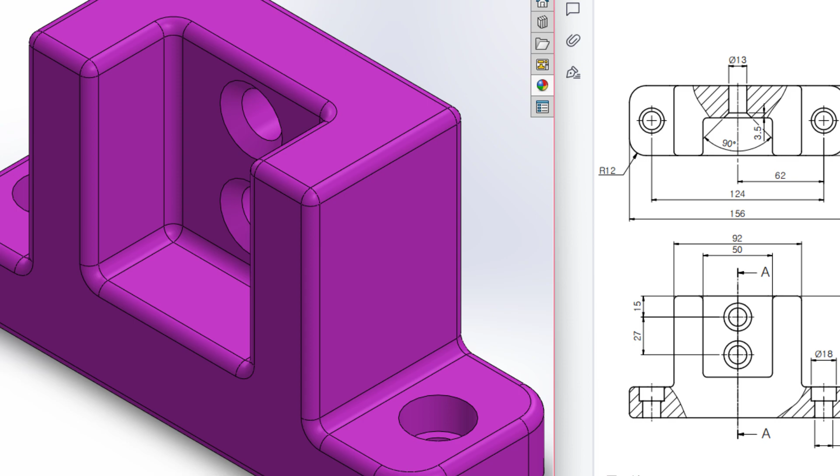Today we are going to solve this 3D problem. In this 3D problem, this is the top view, this is the front view, and this is the right side view. So first of all, I will start drawing from the top view.

In the top view, I will draw this rectangle, and this rectangle has a dimension of 156 by 50 units. Then I will boss this rectangle to 22 units.

After that, we can see we have another rectangular profile here, and for drawing this rectangle we will draw it in dimension of 92 by 50 units. Then I will extrude boss it to 65 units.

Then in this second rectangle we can see we have a rectangular cut like this one. For drawing this rectangular cut I will draw a center line here, and this center line has a dimension of 50 minus 23, which will be 27.

And as the rectangular cut has a distance of 50 units, I will offset these two lines, so this half distance will be 50 divided by 2, so 25 units each. Then I'll close these two shapes, then I will extrude cut it to 58 units. Okay, let's go back to our software and do this.

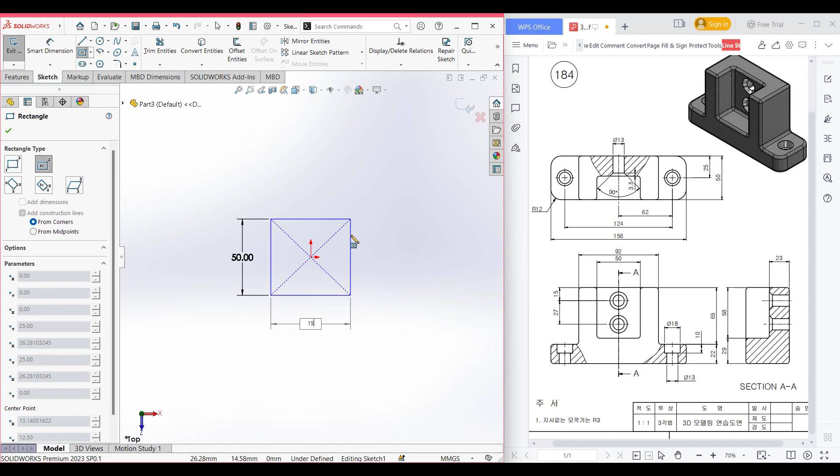First of all, I'm selecting the top plane here. Now right click on it, now sketch. After that, select the center rectangle from here and place it here, and draw a center rectangle of dimension 50 by 156 units. Okay, now isometric it for a better view.

Now go to features, now extrude boss, extrude it to 22 units. Okay, so this rectangular portion has been done.

After that, select this upper face, now right click on it, now sketch, now normal to it. After that, again select the center rectangle and place it here. Now dimension this rectangle to 50 by 92 units.

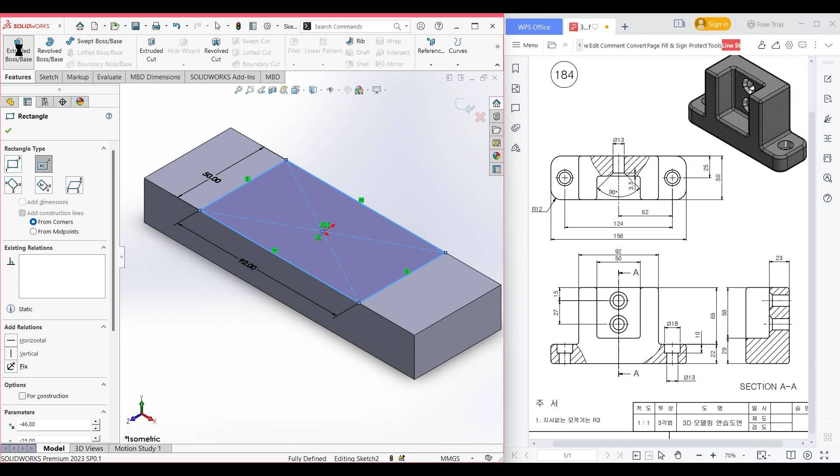Okay, now isometric it for a better view. Now go to features, now extrude boss, extrude it to 65 units. Now press OK. So now it's time for the rectangular extrude cut.

For doing the rectangular extrude cut, I'm selecting this upper face. Now sketch, now normal to it. Now select the center line tool from here and draw a center line of 50 minus 23, so it will be 27 units.

From that, select the offset entities and select this line, and as the total distance is 50 units, the half distance will be 50 divided by 2, so it will be 25 units. Now bidirectional cap ends, now press OK.

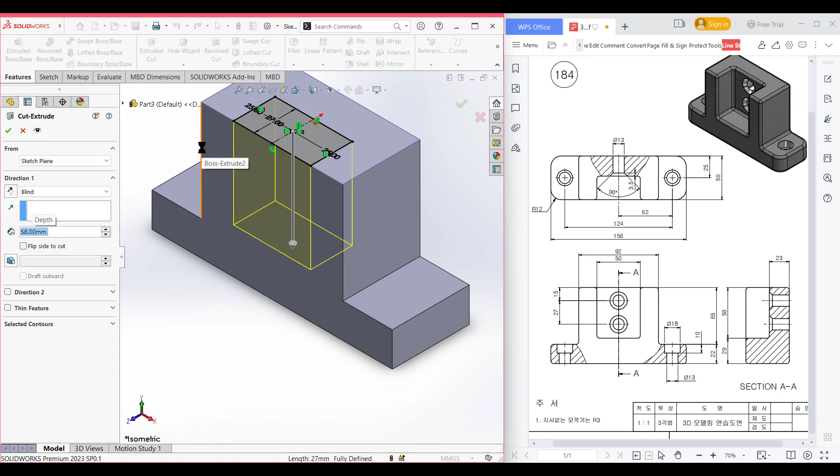Now isometric it for a better view. Now go to features, now extrude cut, extrude it to 58 units. Okay, now press OK. Now let's go back to our sketch.

In our sketch we have two circular extrude cuts, one is here and another two are here. For drawing this circular extrude cut, first of all I will draw a circular extrude cut here, and this has a dimension of 18 diameter. Then I will extrude cut it to 10 units.

Then we have another circular extrude cut here, and this circular extrude cut has a dimension of 13 units. Then I will extrude cut it to through all. After that I will select the right plane here, and then I will mirror this other part also.

Okay, let's go back to our sketch. So I'm selecting this face, and before going back to our sketch, you can see the circular profile here has a distance of 25 units from this line, and from this center line it has a distance of 62 units.

Okay, let's go back to our sketch. So I'm selecting this face, now sketch, now normal to it. After that, select the circle tool from here and place it here and draw a circle of 18 diameter. Now select the smart dimension, select this circle, and from this line the dimension is 25 units.

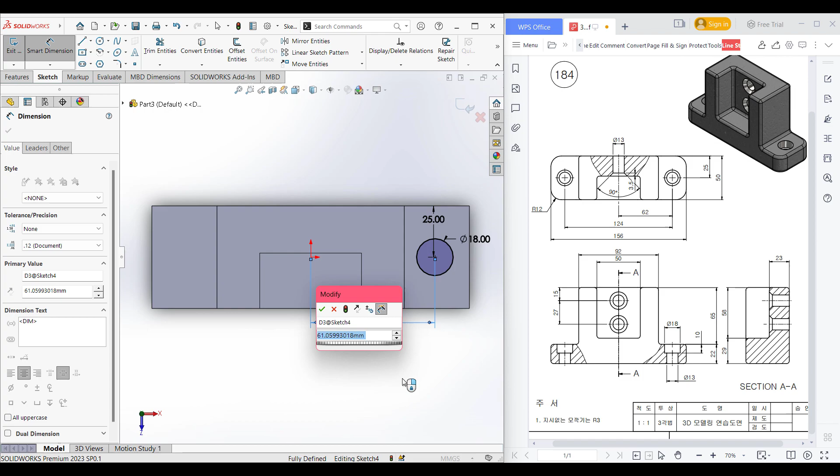Now press OK. Again select the circle, and from this center the dimension is 62 units. Okay, now isometric it for a better view. Now go to features, now extrude cut, extrude it to 10 units.

Okay, this extrude cut portion has been done. Now zoom here and rotate it. Now select this inner face, now right click on it, now sketch, now normal to it. Now select the circle tool here and place it at the previous circle center and draw a circle of 13 diameter.

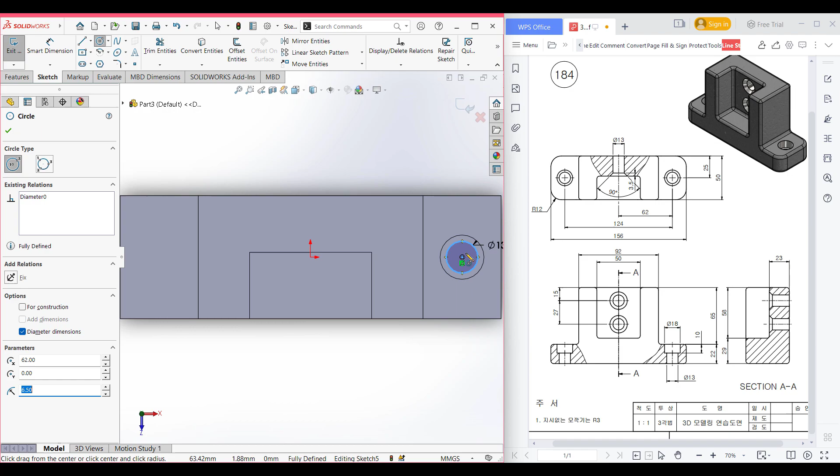Okay, drawing a circle of 13 diameter. Now isometric it for a better view. Now go to features, now extrude cut. Now extend this arrow. Okay, now press OK.

So this circular portion has been done. Now isometric it for a better view.

Now it's time to mirror in this other portion. For that I'm selecting the right plane as the mirror plane. Now select mirror, as I have previously selected the right plane, so the mirror face plane has been selected automatically. Now I'll select the features to be mirrored. We want to mirror the Cut-Extrude2 and Cut-Extrude3 portion. Now press OK. So our mirror portion has been done.

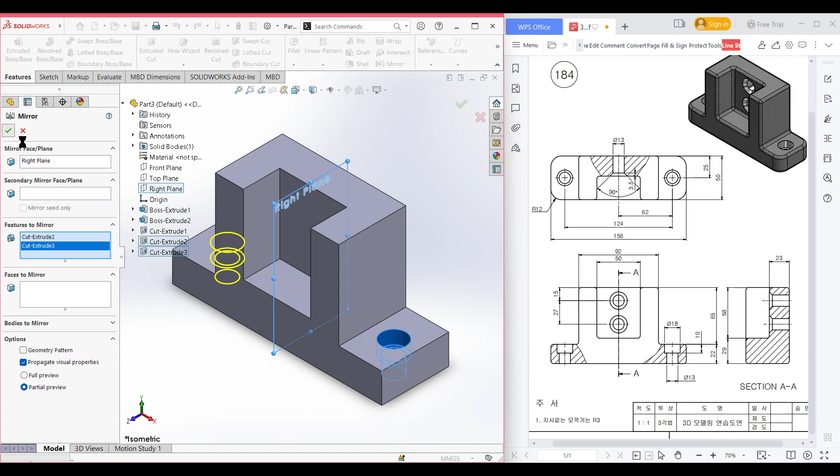Okay, let's go back to our sketch. This time we need to draw two holes, here and another here. For drawing this hole, we can see this circular portion has a dimension of 13 diameter, and we have an angle of 90 degrees here, and this distance is 3.5 units. Now how will we draw it?

For drawing this, I will use the hole wizard here, and from there select this legacy hole, and select the countersink drilled. If we match the sketch here, we can see this lower portion diameter is 13. So here we put the value 13. As I have previously put the value, it has already taken shape.

Then we can see the angle is 90 degrees here, so the countersink angle here and here is set to 90 degrees. And after that we can see the countersink diameter here is 20 units. So how has this diameter been calculated?

If we demonstrate our sketch here, this is our sketch, and the total angle is 90 degrees here to here. So if we draw a center line here, as the total distance here to here is 3.5 units, this distance will also be 3.5 units. And the angle is 90 degrees total, so this will be 45 degrees and this will be 45 degrees.

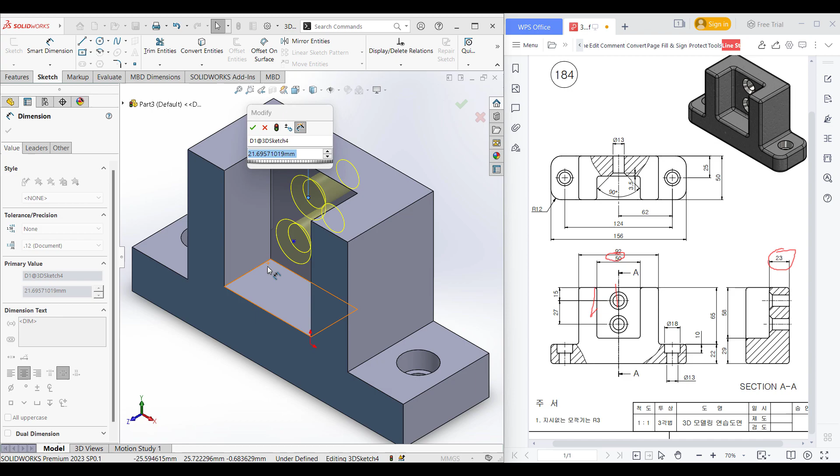And the same for this lower portion also, so the distance will be 25 units. So this two portions have been dimensioned. Now normal to it. After that we can see we have an upper distance of 15 units from this line to this circle, then both circles have a distance of 27 units. So go to smart dimension, and from this point to this horizontal line the distance is 15 units, and from this portion to this portion the distance is 27 units.

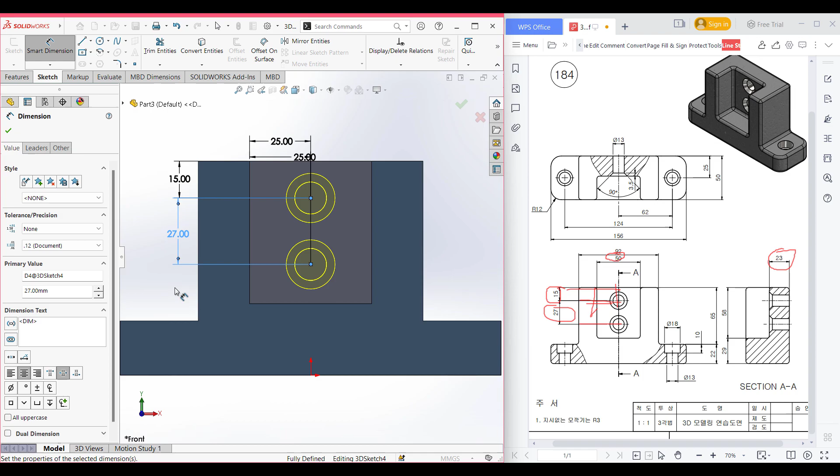Okay, now isometric it for a better view. Now press OK. So our countersunk hole has been cut.

And to measure this distance to this distance, which is 3.5 units, I will use the evaluate measure, and from this circular part to this circular part, if you want to see, you can zoom here. You can see this center to center distance is 3.5 units, which matches our sketch. So our sketch is doing well.

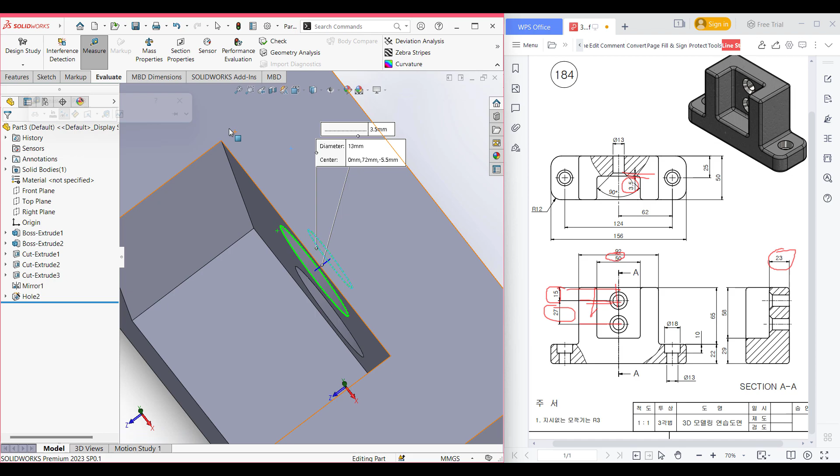Now isometric it for a better view. Let's go back to our sketch, and this time we have the fillets to be done. We can see we have one fillet and another and another, and all of these fillets are 12 units. We have many fillets in the total sketch here, and all the other fillets are 3 units. So let's go back to our sketch and fillet all the portions.

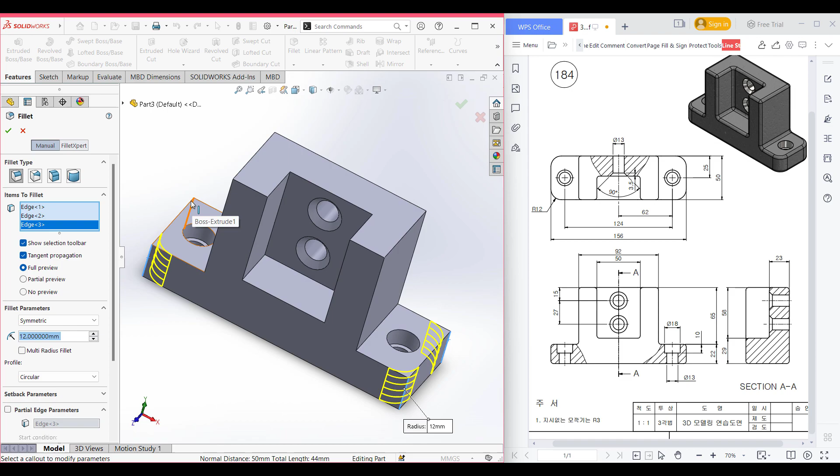So I am selecting the features now, fillet. Now for the fillet, select the 12 unit value. Now select this line and select this line, and you can rotate here, or hover to see the back face of the line, or rotate and select manually. Now press OK. So this R12 fillet has been done.

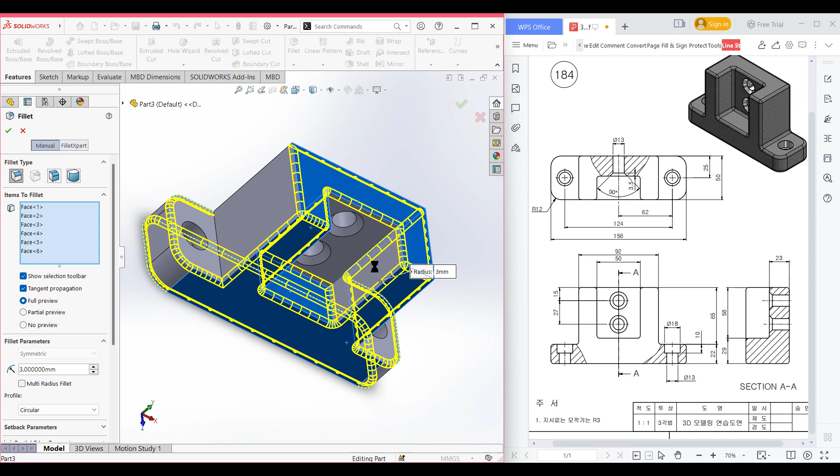Now we need to draw the R3 fillet, and for drawing the R3 fillet, we have to set the dimension to R3, and now select almost all the faces we need to do fillets on. I'm selecting all the faces that need to be filleted. So this face also, this face. Okay, we think we are done.

Now press OK. So all the fillets have been positioned as usual. Now isometric it for a better view. So as you can see, we have drawn our 3D sketch.